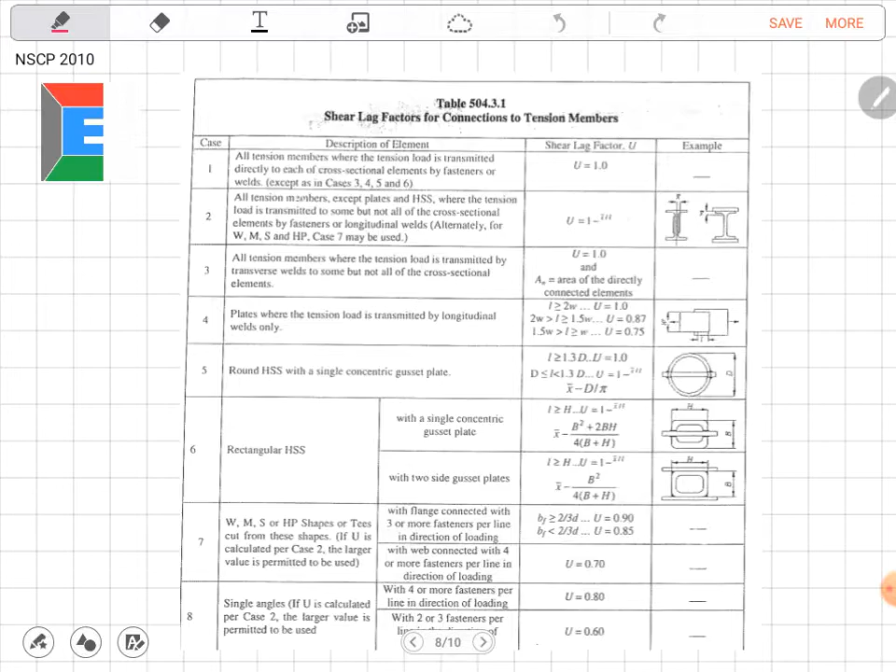Okay, hello guys. So this is our first topic in structural steel design, regarding the design of members for tension. These are the codes under section 504 on the design of members for tension, for NSCP 2010 and 2015. Let's explain this one by one.

Under section 504.1, according to slenderness limitation, there's no maximum slenderness limit for the design of members. However, they have a preferable slenderness ratio, which is L/R, that must be less than or equal to 300. It should not exceed 300. I think that's clear.

Now let's go to 504.2. The design tensile strength, which is Phi times the nominal tensile force, and the allowable tensile strength, which is the nominal tensile force divided by the factor of safety of tension members, shall be the lower value obtained according to the limit states of tensile yielding in the gross section and tensile rupture. So the lower value we pick is between tensile yielding and tensile rupture.

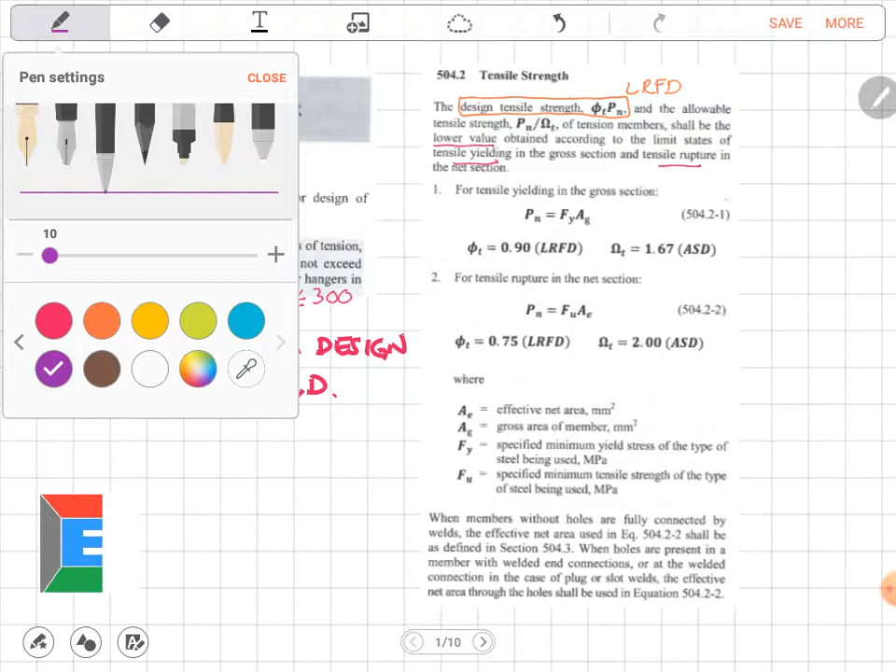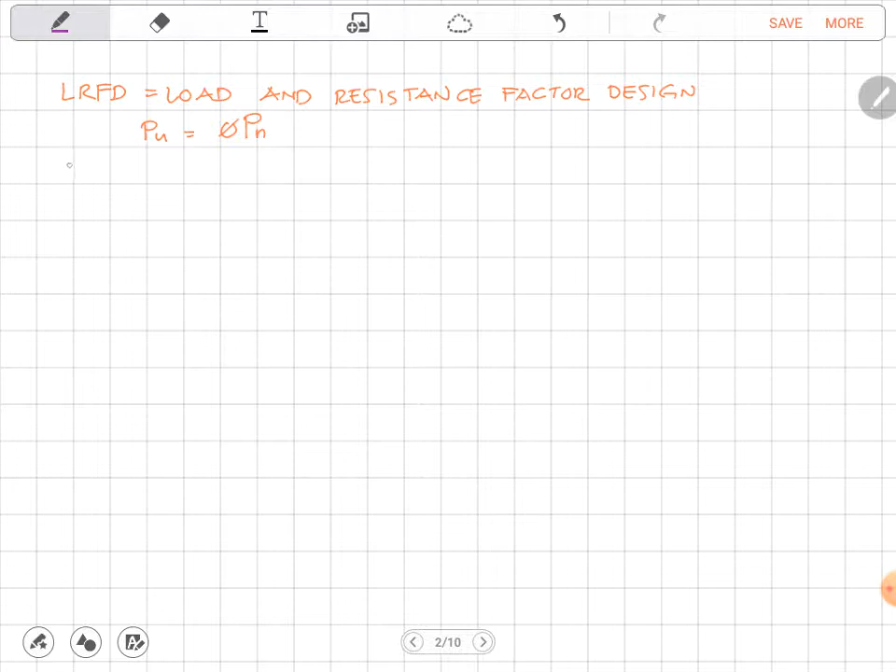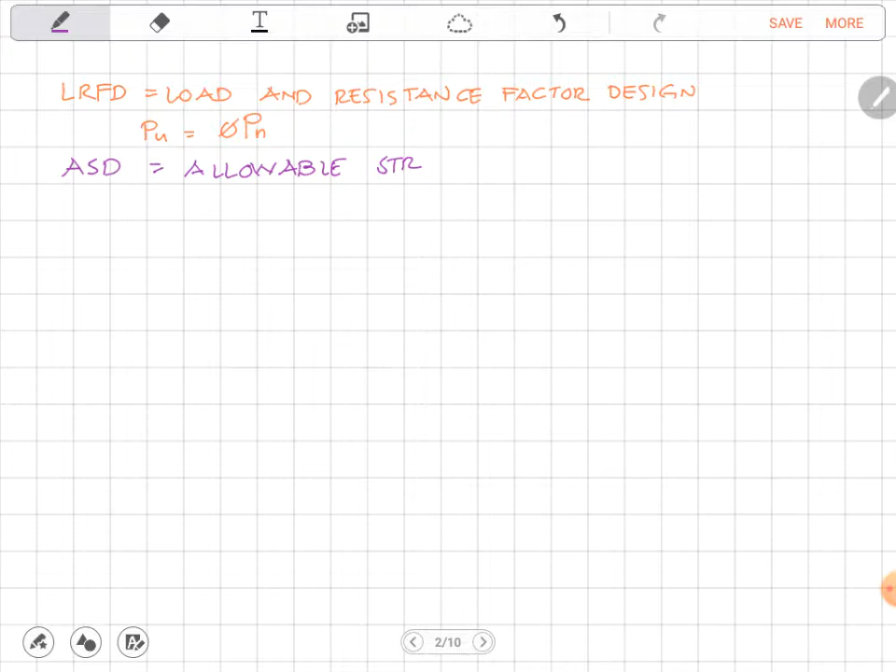Then here, let me change the color. This is the allowable tensile strength, which refers to ASD, the Allowable Strength Design. So that's PN over the safety factor. That's the formula.

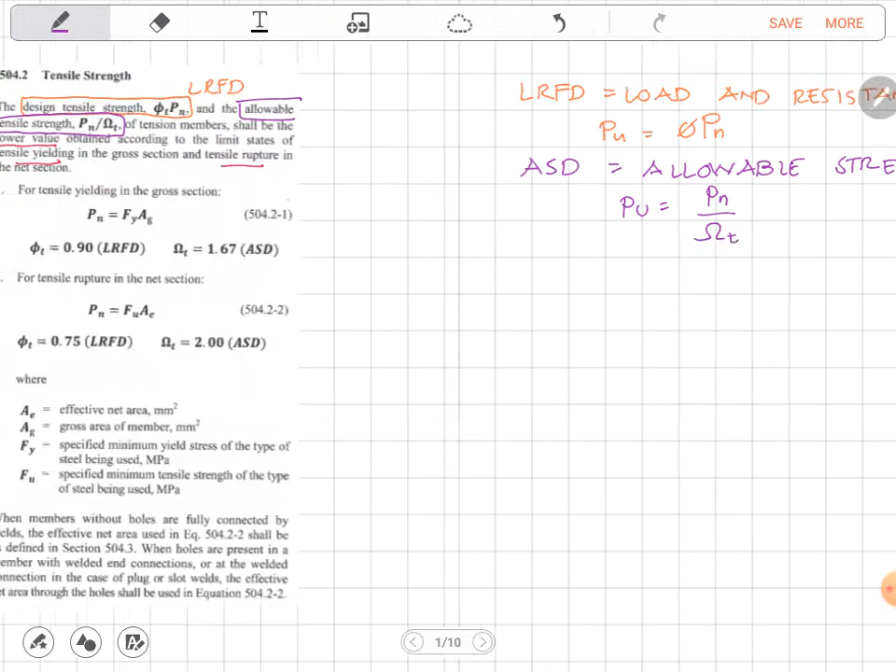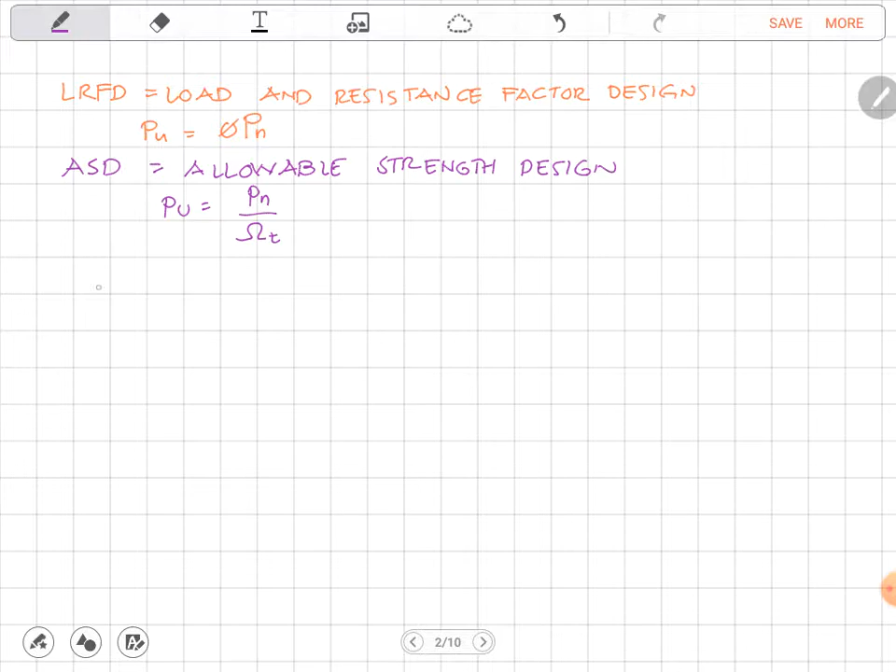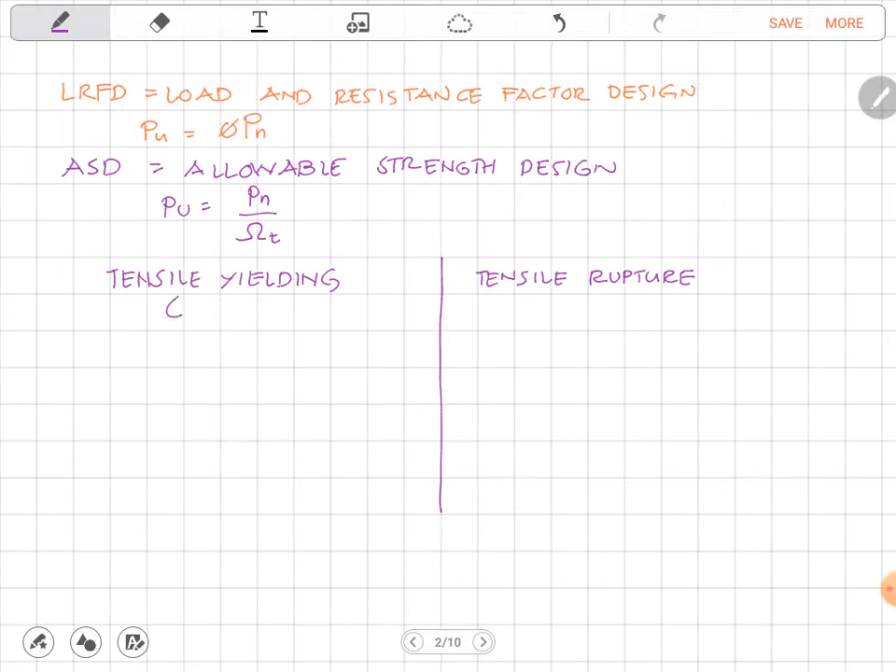Now let's go to tensile yielding, and on the other side, we have tensile rupture. The formula for tensile yielding is the nominal strength equivalent to Fy times Ag, the gross area. So we see that tensile yielding is based on gross area, while tensile rupture is based on the net section, but we consider the effective net area - not just the net area, but the effective one. So PN equals Fy times the gross area.

Where Phi is just 0.9 for the LRFD, and the factor of safety for ASD is 1.67. So it means that if this is PN equals Fy times gross area, for ASD...

When we compute the allowable strength, which is PN divided by the factor of safety, we substitute Fy times Ag divided by this factor of safety of 1.67. So 1 divided by 1.67 is approximately 0.5988 in decimal. Fy times gross area - that's why you'll see in books, sometimes they use 0.6 times Fy times the gross area when computing PU. So there's no difference.

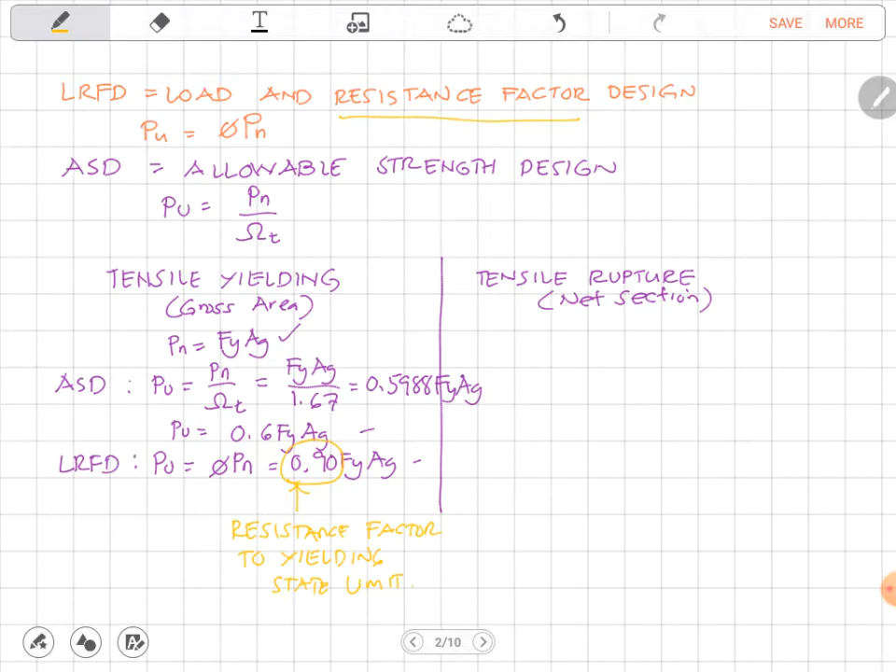Okay, tensile rupture rather. So the formula for finding the nominal strength, let me change the color since it's not clear. It's just FU times the effective net area. Notice it's effective net area, not just the net section - it's not An that we'll use. Don't get lost, effective net area.

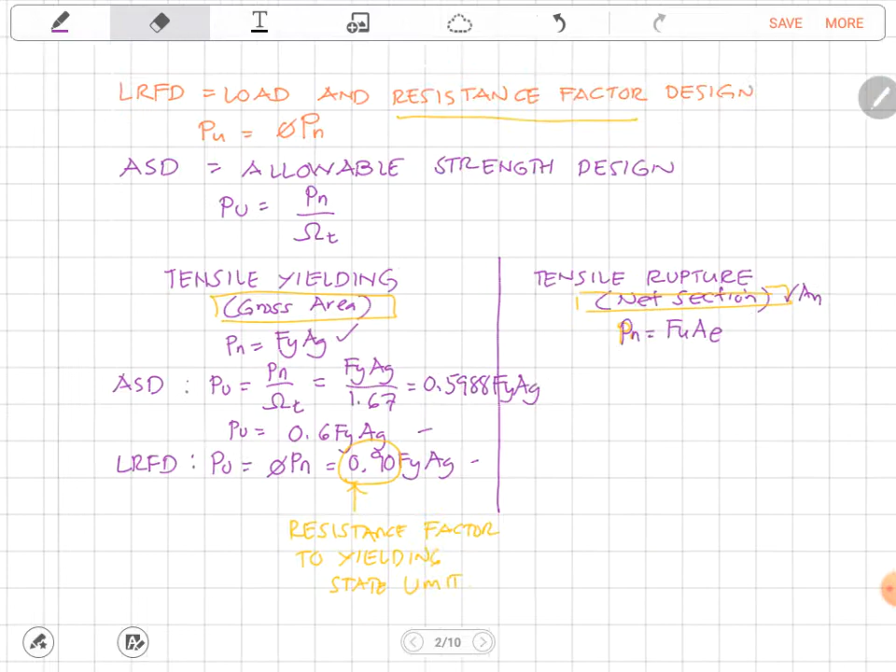Where the phi to be used is 0.75, while the factor of safety is 2. So, for finding the ASD for tensile rupture, PU is just equal to PN over the factor of safety. So if we plug that in, that is FU times AE divided by the factor of safety, which is 2.

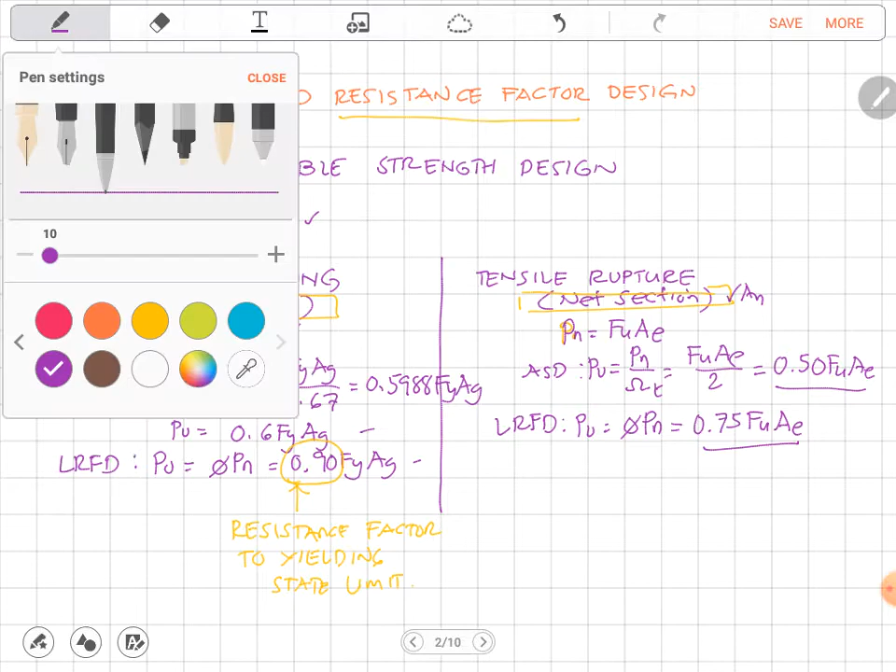I think that's it. I advise memorizing the formula this way. By the way, the 0.75 is also called the resistance factor - resistance factor to fracture limit. I think we're okay with the formula now.

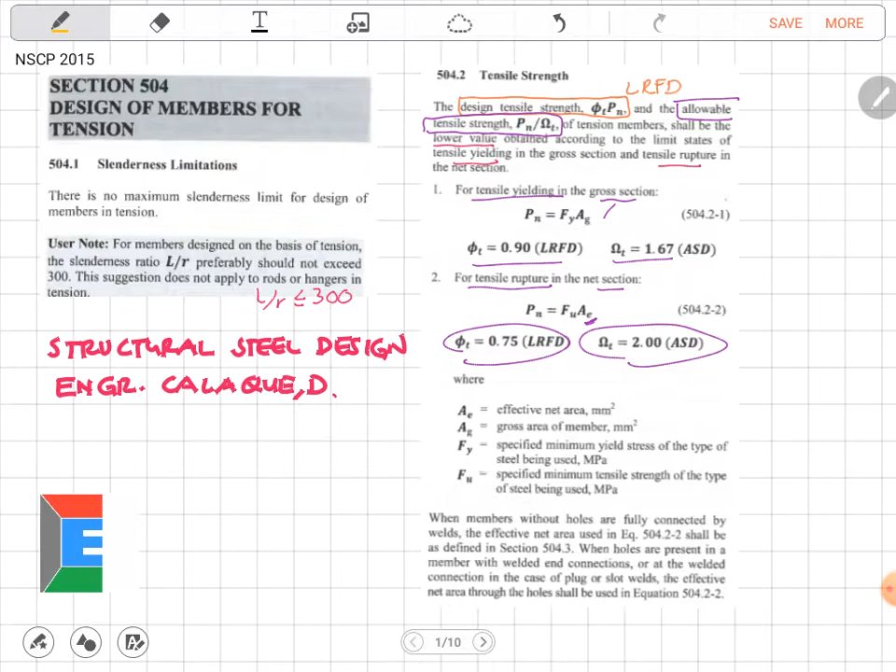Let's go to the labels. The effective net area must be in square millimeters, and the gross area must also be in square millimeters. Fy, that is called the minimum yield stress - that's a constant for A36 steel, just over... megapascal, if I'm not mistaken.

And we have the specified minimum tensile strength. It's easy to remember yield - from the word yield, there's a Y, so Fy. Then specified minimum tensile strength is Fu, also in megapascal. For A36 steel, if I'm not mistaken, Fy is 248 megapascal. Sometimes problems use 250, but the actual value is 248. Then for Fu, that is 400 megapascal. I think that's clear for section 504.2.

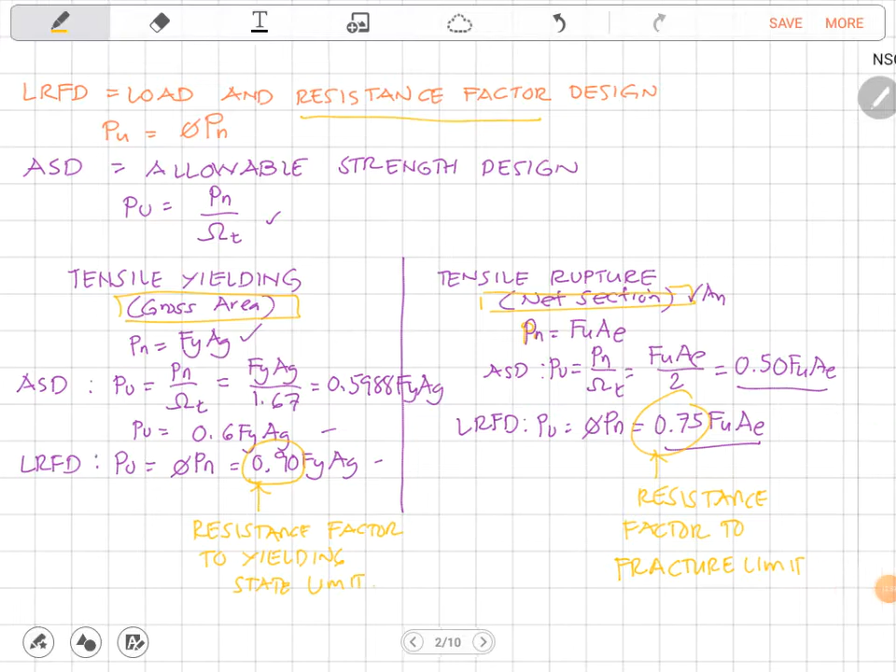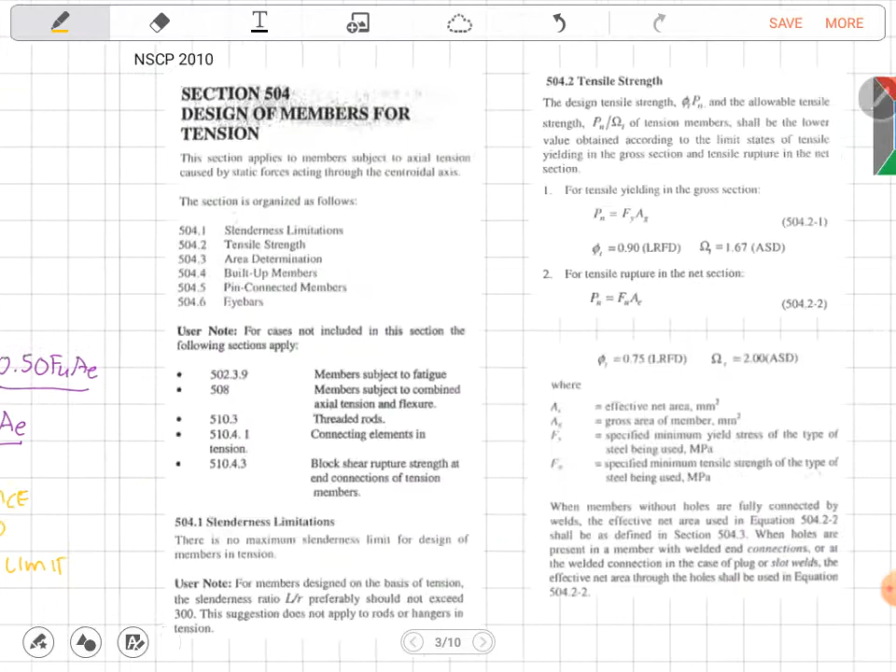So we can see this is 2015. Let's check 2010 to see if anything changed. We see it's just longer in section 504, but the same thought. The slenderness ratio preferably should not exceed 300 - but this suggestion does not apply to rods or hangers in tension.

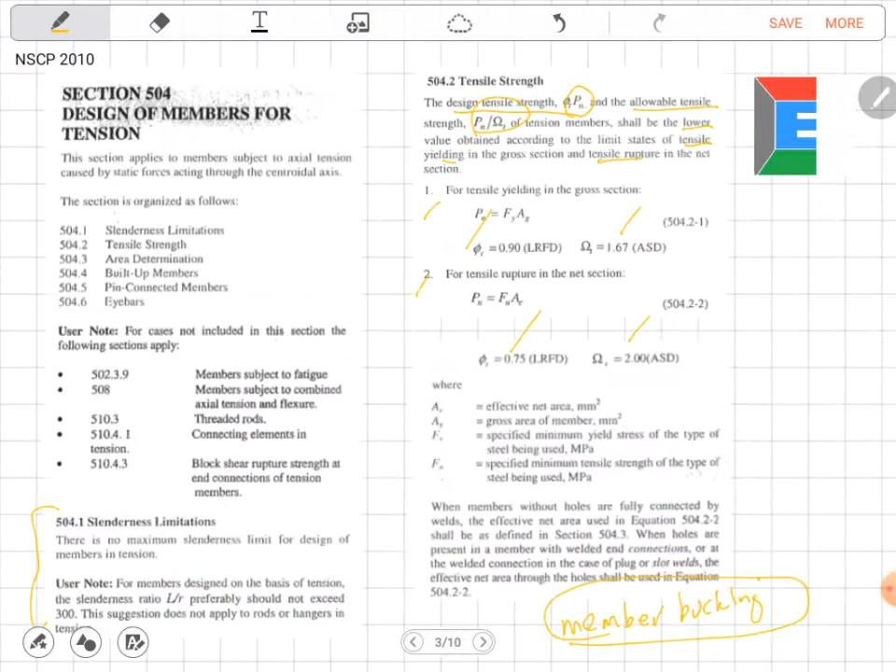The factor of safety is the same throughout. So I advise memorizing this for ASD and for LRFD: for tensile rupture, that's 0.5 FU, then we have 0.75 FU - since it's not as painful to look at. Okay, sige.